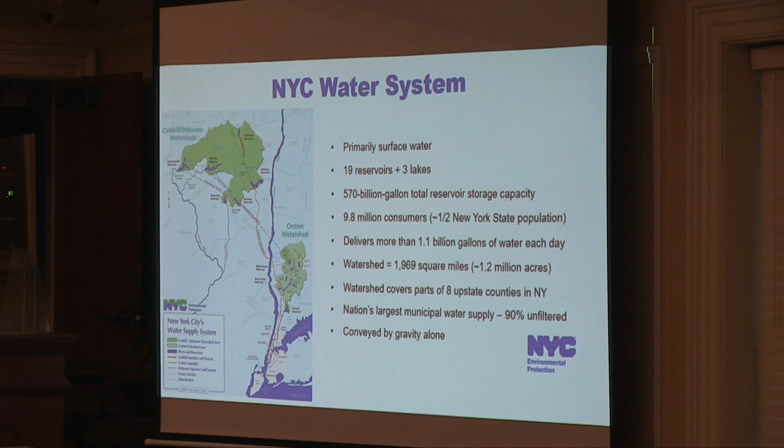So we deliver more than 1.1 billion gallons of water each day. About 1 billion of that is for the city proper. 100 million goes to our upstate customers. Yonkers and points in Westchester County, really south of 287, make up about 80% of that upstate demand. The watershed's really large, about the size of the state of Delaware, almost 2,000 square miles or about 1.2 million acres. It covers parts of 8 counties. And we are the nation's largest municipal water supply. We are nearly entirely unfiltered. We're entirely gravity fed. We do have some portions that are pumped inside the system when we need extra capacity.

So what's happening? So the Delaware Aqueduct, the newest of our 3 aqueducts, is a deep rock tunnel. It exists anywhere from 300 to 500 feet below ground. It's about 13.5 feet in diameter, so it's the kind of tunnel that you could drive a bus through. It has had identified leaks since the early 1990s, the late 1980s. We did identify leakage in that system.

And there's 3 segments of the Delaware Aqueduct. There's a segment in Ulster County to Dutchess County, which is the Rondout West Branch Tunnel, and that's the section that is leaking and that will be taken out of service. So that effectively cuts off the east part of our system, the east of Hudson in Dutchess, Putnam, and Westchester counties from west of the Hudson in Ulster, Sullivan, Delaware, Greene counties.

And so when that Rondout West Branch Tunnel, part of the Delaware Aqueduct, is shut down, is what really begets where the town of Southeast come in, because we need to pull from all different other parts of those systems that I described to be able to meet the demand for the city and the demand for Westchester customers, and the town of Southeast, and Carmel. The town of Carmel is a nearby neighbor that also draws during that time.

So the Delaware Aqueduct shutdown has 2 areas of leakage. The one under the Hudson River is so severe that it's actually slated to be taken fully out of service. And between 2012 and today, we have actually built a parallel tunnel. This is right in the area of the Newburgh Beacon Bridge for members of the audience or members of the board that are familiar with the Newburgh and Wappingers Falls area of Dutchess County. So there's been a new 2.5 mile long bypass tunnel built parallel to the existing Delaware Aqueduct.

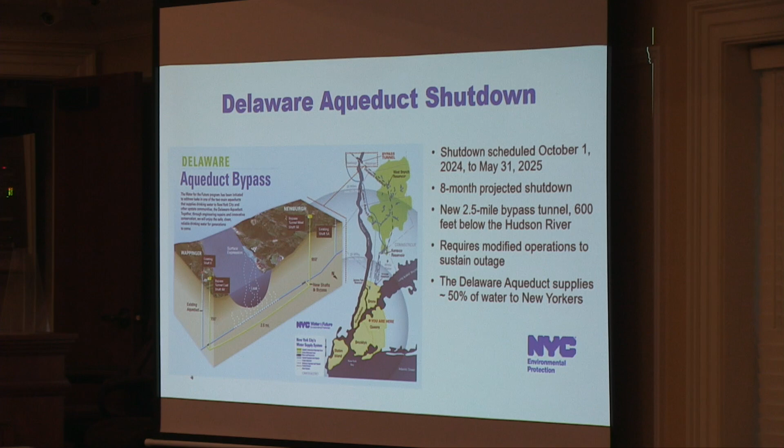And this October is the final piece where we need to actually connect the new tunnel with the old tunnel and take the portions of the old tunnel out of service. So to do that, it will require up to 8 months. It will require modified system operations to be able to meet the city and the upstate demand during that time.

So some nice pictures. As I mentioned at the start, this is the largest, most complex repair project in New York City water system history, all 176 years of it. It cost about $1.5 billion. There's always additional costs, but that's money well spent to sustain the system for another century or more of operation and to continue the great leadership role that New York City is able to play to the region for its water supply and wastewater challenges.

So pictures on the top left is NORA, the tunnel boring machine. So that was actually built, operates almost like a locomotive, and it just slowly bores through the rock. It actually brings the rock through it, and then it's able to haul away the tunnel muck, as it's called, and bring that out of the thing.

The bottom left is some jackhammering and blasting for actually drilling the vertical shafts when they initially built them. So you start with building vertical shafts down. They're 700 feet deep and 900 feet respectively, and then you lower the tunnel boring machine down in pieces, assemble it, and then you start to drive your locomotive across underneath the Hudson River.

So in that 2.5 miles, the grade change is 200 feet? No, it's the surface elevation that changes. Oh, okay. Yeah, the tunnel is mainly flat. It's got a little grade to it, maybe 1%, less than that.

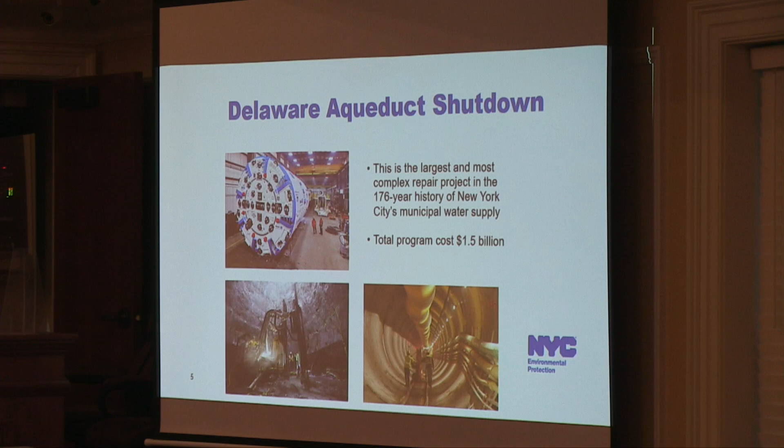Sorry. And then the bottom right is the actual finished tunnel. As it looks, there is ventilation and power and water conduits that will all be removed prior to putting it in service as a water tunnel. So it will be a bare tunnel.

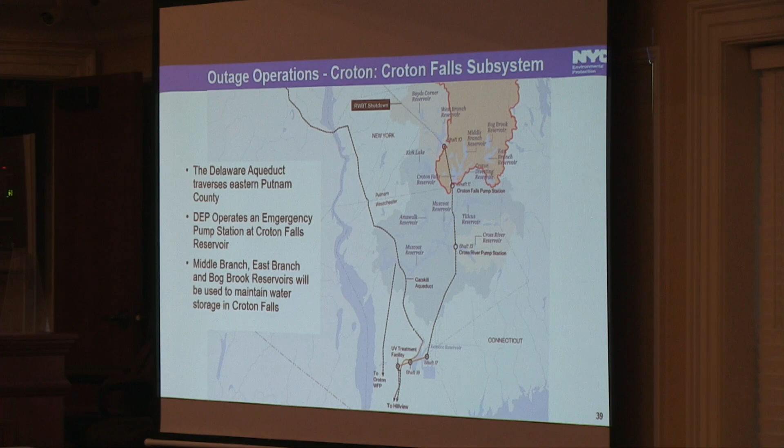Shifting gears, getting a little closer to home. So, outage operations for the Croton system. So we have the Croton Falls subsystem. So in this area of Putnam and northern Westchester counties, you have the East Branch and Bog Brook reservoirs right across the street. It's East Branch Reservoir, so we covered that. You have the Middle Branch Reservoir, which is the source of drinking water for the Brewster Heights Water District. And then you have the Croton Falls Reservoir.

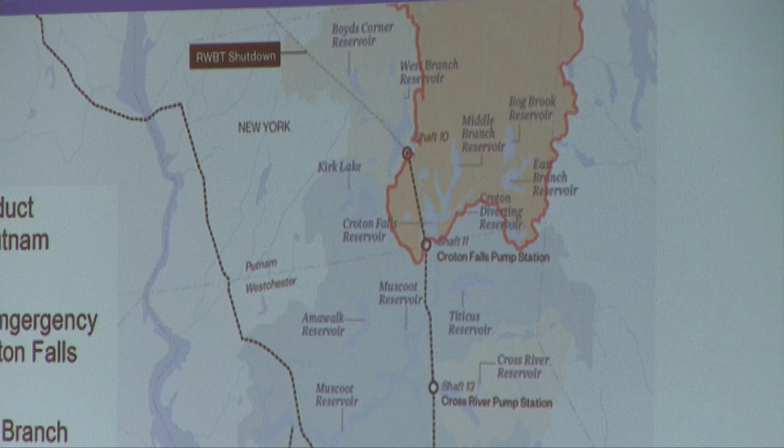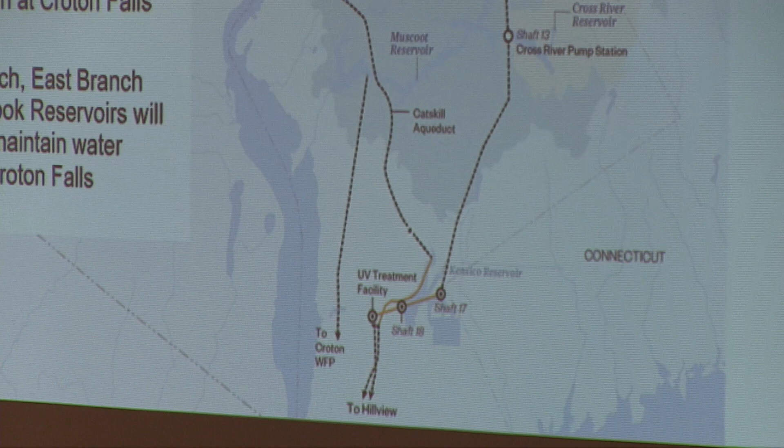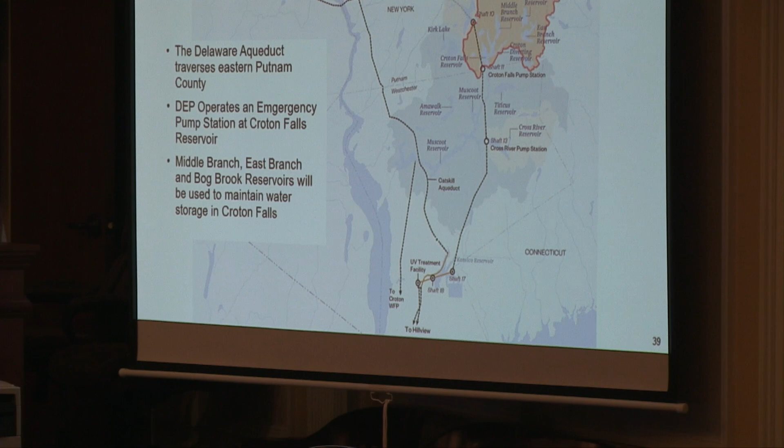So the Croton system is what we call a cascading system of reservoirs. So the east, middle, and west branches of the Croton River all cascade in these series of reservoirs that just flow downstream from one reservoir to the next. So at the Croton Falls Reservoir, there is an intersection point because the Delaware Aqueduct was built underneath it. And so we actually have an emergency pump station at the Croton Falls Reservoir. We're able to withdraw water from the Croton Falls Reservoir and then pump that into the Delaware Aqueduct.

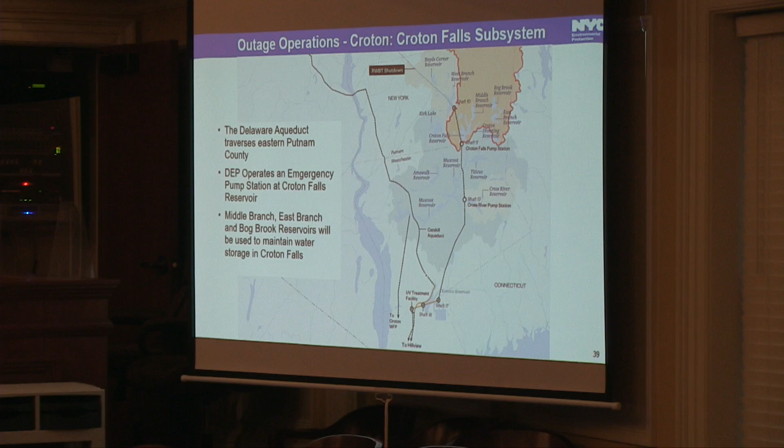So this portion of the system will be actively used, and it's the actual operation which most directly impacts the use of Middle Branch Reservoir water during our shutdown. So Croton Falls, East Branch, Bog Brook, they will all collectively be used to feed this pump station, and it'll manifest itself and appear as a greater reservoir drawdown. So the water level will drop in the reservoirs more than what you would normally see in probably the last generation or two of usage of these reservoirs.

We have a similar emergency pump station at the Cross River Reservoir. That's a little different because it doesn't have feeder reservoirs towards it, and it's just the Cross River Reservoir. It's a little smaller pump station, and the reservoir itself has less volume to be used. So the Croton Falls pump station has a very large role. The Cross River has a medium-sized role for sustaining our system during the shutdown operation.

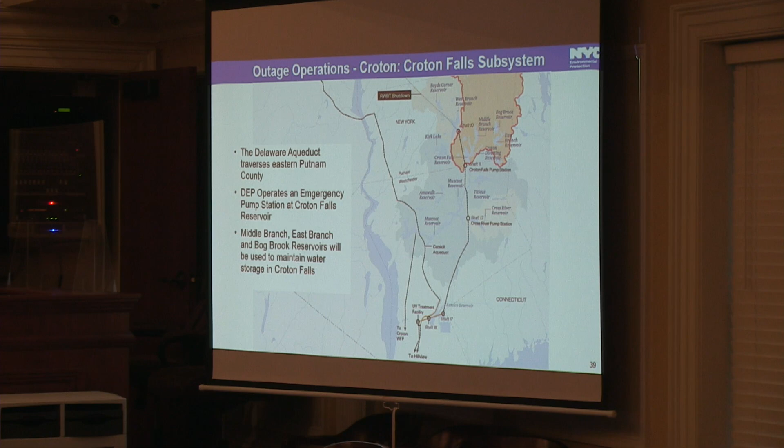And feel free, if you have any questions, ask away. We will. All right.

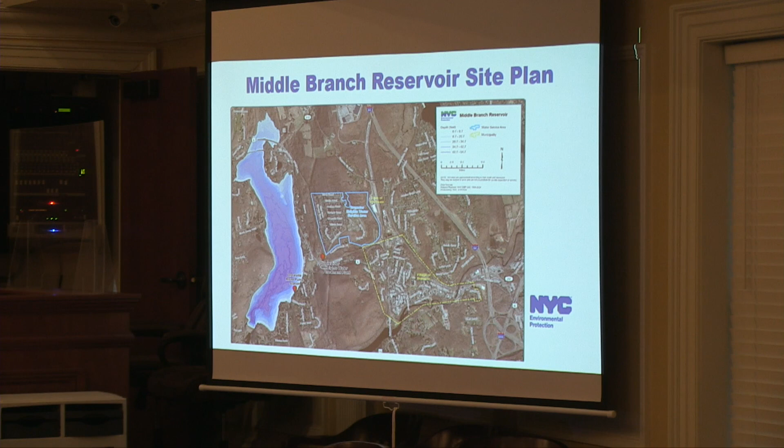So where does the problem come in? So the Middle Branch pump station has an intake. It is a pump station. It's on the shoreline of a reservoir. There's a line that runs out into the reservoir, and it goes out only to a certain depth. DEP plans to use Middle Branch water along with East Branch maybe a little bit more than we have in the past and more than the Brewster Heights Water District and the pump station has observed recently.

So we live by operational data. I'm sure the operators from VRI can tell you there's nothing like actually doing something and testing it and actually seeing that it works; it beats a theoretical calculation any day. So that's where we really wanted to get involved with your team and be able to devise a plan that we would be comfortable with, given the drawdown of the reservoir and potential problems that have been realized in the past.

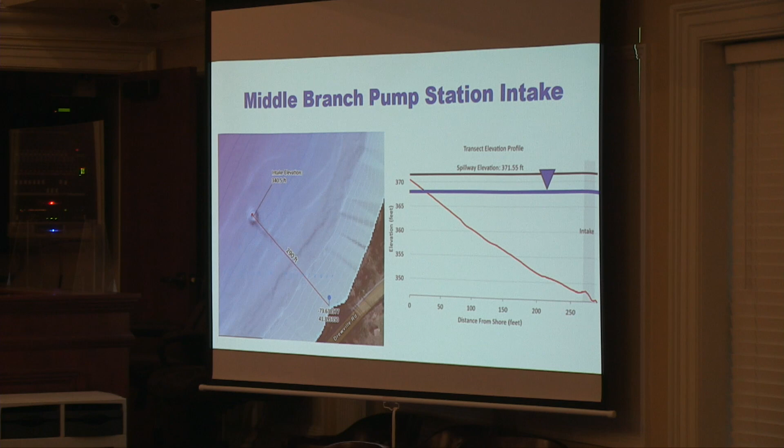So I oversee 70 community connections to New York City. We have records going back to the early 1900s on onion skin typewriter paper. And so in this record set, we came upon some email correspondence from 2004 that identified a problem with the pump station where water delivery was not possible, and a reported air condition developed where the pumps weren't drawing water, they were drawing air, and that's obviously a problem for a water system that you want to deliver to. So this led New York City to further modify its system operation.

So the chart that you're looking at shows the normal pool elevation, which is the colored lines that are all the way towards the top of the chart. And I don't think you see my cursor. Let's see if that gets a cursor.

There we go. There's a cursor.

So this is the normal spill or pool elevation of what Middle Branch Reservoir will look like. The yellow area is the range of operations and range of levels that we've seen over the 30-year history of usage of the station. And the blue line is what we are projected to do this October 2024. Starting in October, we'll start drawing down the reservoir. And we basically modified our plan so that we would go down to just below your pump center line and just touch the reported air condition where there was a previous problem.

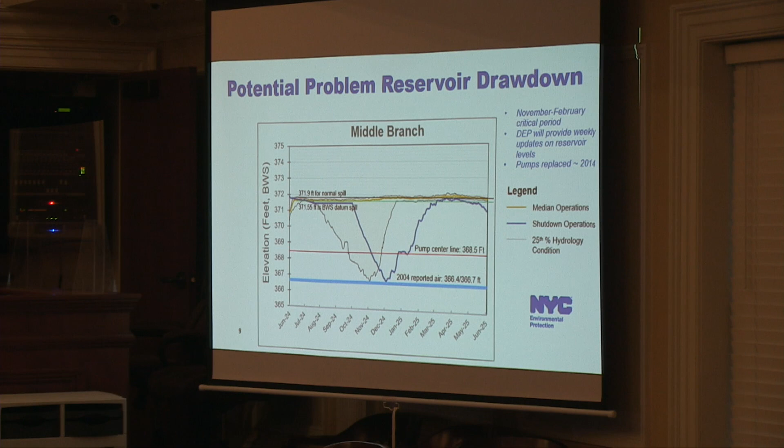And these are useful, as we'll get into in the next slide. These are useful contingency planning metrics and mechanisms for any day-to-day risks. New York City comes to you today because we have a particular shutdown, a particular change in operations for Middle Branch Reservoir, but the water district has existed for its 50-plus year lifespan as a single intake on a roadway, and transportation accidents happen. So there are other risk factors that we're not addressing today, but we did want to share them with you openly so that Robert and the VRI team can help to identify and address them in the future. And you have.

So when we looked at contingency planning, we had potential risks being reservoir levels, spills, mechanical, physical disruptions. So spills really speaks to transportation accidents. Folks in Westchester County may recognize that there was a large gasoline tanker that spilled along Titicus Reservoir in North Salem 4 or 5 years ago, more or less.

And in Peekskill, their water system was actually taken out of service in 2018 when a coal tar and asphalt truck dumped over right near one of its pump stations, and they had to go off their system and onto New York City's supply as a backup for about 2 months, in the midst of a different shutdown in preparation for our Delaware Aqueduct. So I've seen real transportation accidents, and I mention them because they're a real world experience and the risk factors there.

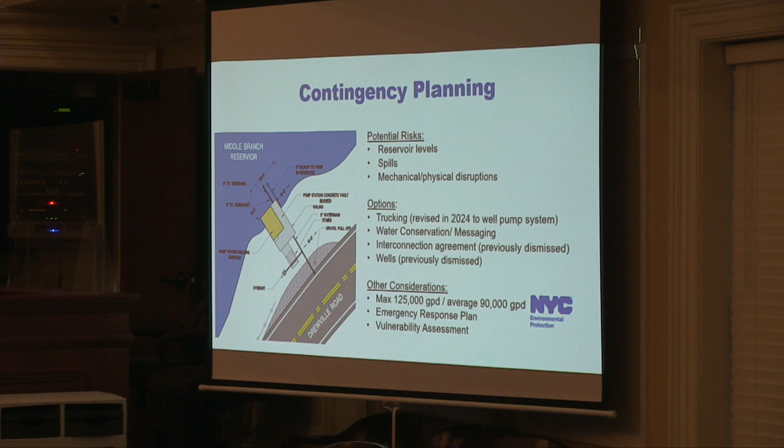So we'll jump right to the proposed pump station rehab. Robert or Mark? It's not like all three of you that talked about this for a long time.

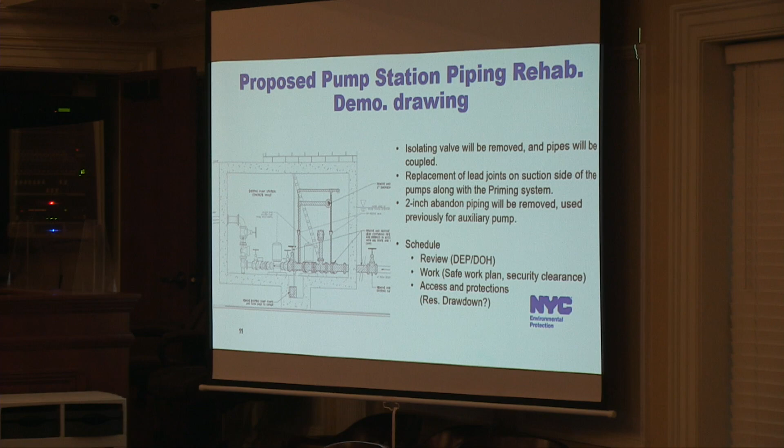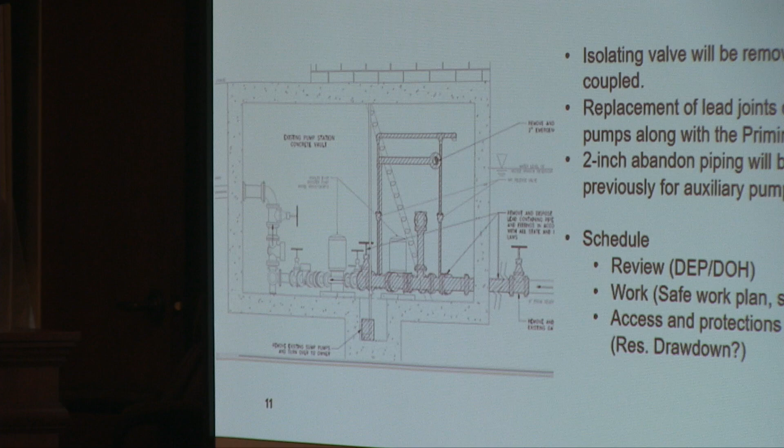So it's the old make lemonade situation here. We have what's going on with the reservoir level going down, but there's another issue that exists with the pump station: the suction piping to the pumps has lead in it. Obviously, lead and water surfaces are no good. We also have a valve that doesn't work on the suction side. So this is an opportunity to replace all that and fix a problem that's been lingering for quite a bit of time. And also there's the abandoned 2-inch line that's been sitting in there since probably the last time this was done.

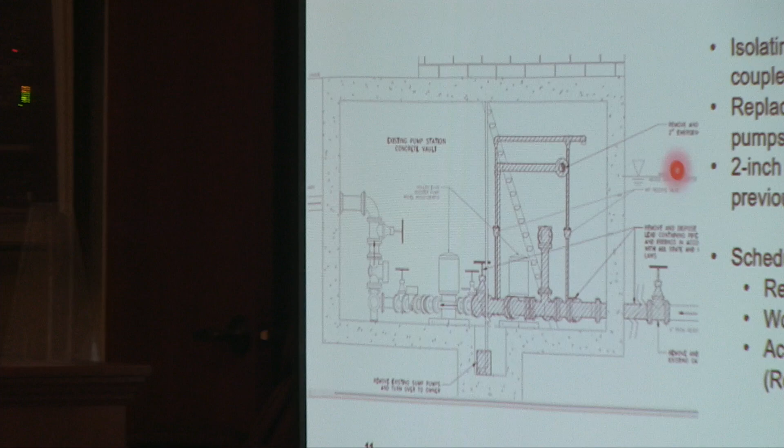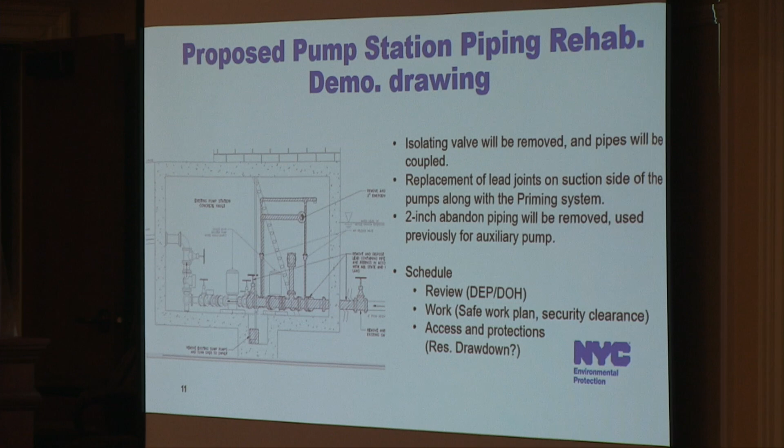So that's the valve, and then what's hatched is the piping that's connected with lead joints. So besides putting in the well system that allows us to pump water in the event that the existing pumps can't do it because the level goes down too deep, we'll be able to bypass it completely and be able to replace that suction piping. We'll install it just in case, but just in case, let's do all this work too, right? If we want to advance.

And this would not be the first time that a backup pump has been installed. Correct. To my knowledge, it's probably the third time, right? So this approach has worked before in the past, right? Putting a well pump in the reservoir and pumping into the piping.

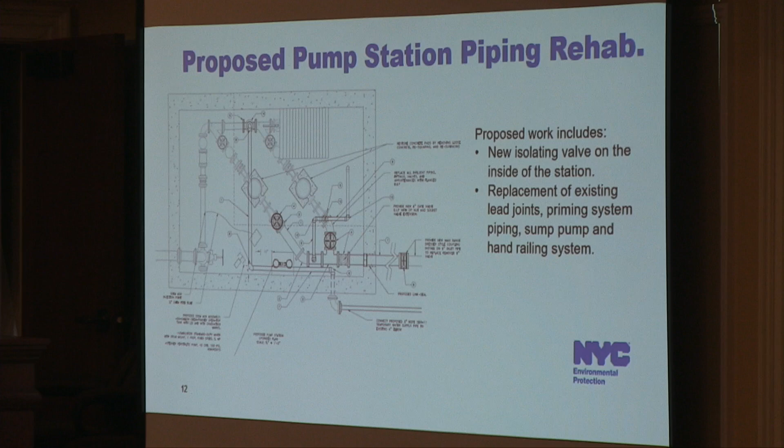And this is a plan view, so if you walked into the pump station and you looked down, this is what you would see. You would see the suction pipe, 2 pumps, and it's kind of hard to tell, but there is a well pump on the reservoir that we keep talking about. It would come in, the 3-inch line, and then be connected, teed right there, upstream of where the pumps are. So we can isolate them with valves and replace everything behind them. Yeah.

Robert, were you able to locate the old pumps? I remember that being brought up at some point. So, no, we didn't go looking for the old pumps, but the 2-inch piping that's identified there, we're thinking if you follow that to the end, that's where it might be. Right. Well, we have activity in the reservoir, people on boats and et cetera. That'll be the time to do it.

Okay. So, in coordination with New York City Water Supply here, we looked at the existing pumps. We did all the math, calculations, drawdown. There's a term we like to use called flooded suction, which is what your existing pumps are. That means that the water level is higher than the pumps, and that keeps the pumps happy. There's an elevation at which it can handle some drop in elevation, and there's a point where it won't work anymore. And we went through those calculations to figure out what that point would be.

And we were talking about whether the drawdown was the worst case scenario or not. So I think for a pretty long duration of the expected drawdown, we might be able to just use the existing pumps. We'll be able to pump the water we need without any issue. Now, granted, we're still going to have the well pump in place in case they can't, right? So let's skip ahead.

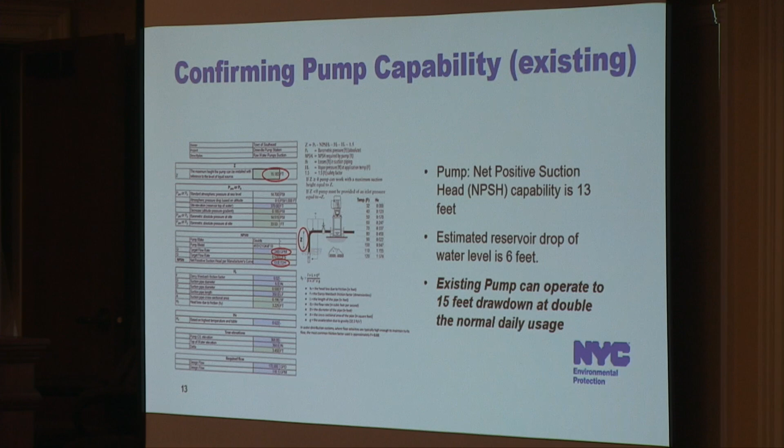And that will be there for the future, if there was a drought or something, that would be accessible? So the connection point, if you went into the pump station today, you would see the connection point that was installed the last time this was done. The only issue with that is it's connected to the suction side, which is where the lead piping is. So we have to connect in a different place to allow us to replace the lead piping, right? Okay. Yeah. And that way it allows us to bypass the pumps altogether.

So chances are that the well pump that we're installing today is probably larger than the well pump that was installed in the past. Because in the past, my assumption is that it was used to provide suction head to the pumps. And this time we sized the pump to pump all the way to the treatment plant, right? So the well pump independently can pump all the way to the plant. So the pump at the station is what's getting the water to the heights.

The heights isn't sucking, it's pushing. That's right. This well pump is sized to do that, right? To the treatment plant. To the treatment plant. The treatment plant to the heights. Yeah. That's right.

So, as you guys are probably accustomed, well pumps are typically vertical. You have a vertical casing, the well pump's put inside, but it can be done, and this is actually kind of a typical way you do it for, let's say, a leachate pump in a landfill. In this case, it's cleaner water, but there'll be a casing which we propose to be an HDPE pipe, and inside that casing we'll slide the well pump, the discharge piping, and the power and control wire that goes with it.

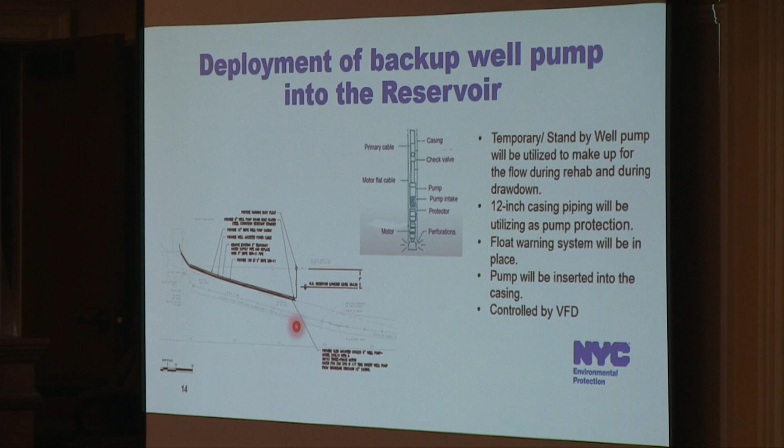So, go ahead and advance, I think. Yeah, so again, we went through all the calculations to size the pump, shared it with everybody, triple checked and all that. So again, 15 horsepower well pump, gets us 200 gallons a minute, and it'll get us water all the way to the treatment plant. And with the VFD, it'll dial it in. So if we're pumping too much, we can adjust the hertz and slow down the flow rate, and the plant filters will get the same water they've always gotten. We don't want to overload the filters either.

So with that control, it's possible that you could pump too much water, like they're not using it fast enough, where it would have to slow down. Right, because with pumps it's more of a horseshoe than a fine target kind of thing. So we're aiming for 117 feet TDH, we're going to get 200 gallons a minute. But if the differential is different and we don't have 117 feet of head, and we actually have 90 feet of head, then we'll pump more than 200 gallons a minute. So the way to control that is adjusting the hertz on the pump.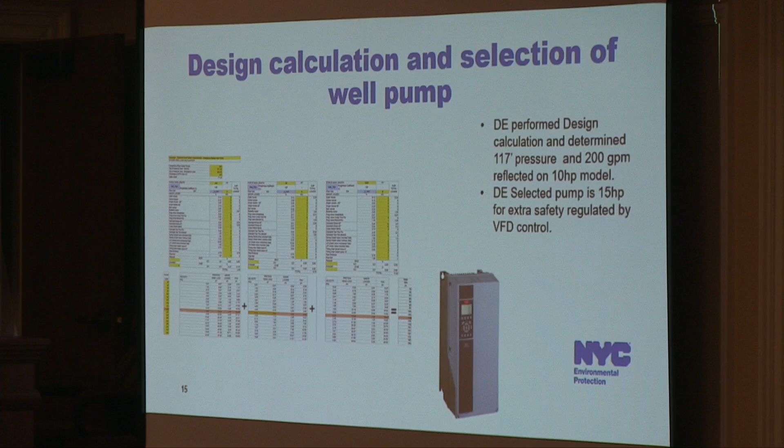So I think we're done. That is it. Questions? Oh, I got some. This has nothing to do with it. The 14-inch pipe that you're replacing. 14 foot. 14 foot, I'm sorry. Is that, I wouldn't say pressurized, but is the water basically in the whole entire 14 feet? That is pressurized. Absolutely pressurized. Okay. So the original aqueduct is a 13-foot, 6-inch diameter.

The replacement or the bypass tunnel is a 14-foot diameter, and that's to accommodate for the friction loss for the bends when it leaves the existing alignment and then returns to the existing alignment. So there's a little bit of friction loss at those bend points. They're maybe not true 90-degree bends, but they're pretty close to 90. And so there's the friction loss there. So they upsize that pipe.

It's also steel interlined. So, part of the anecdotal New York City story is that during World War II, steel was at a premium for the war effort for tanks and was less prioritized for water supply pipe uses. So we may have installed more steel at a different time in United States history when we were building that aqueduct. And the new tunnel is entirely steel interlined, where it was about 5,000 feet on the existing tunnel. So it's upwards of 11, 12,000 feet for 2.5 miles to get there.